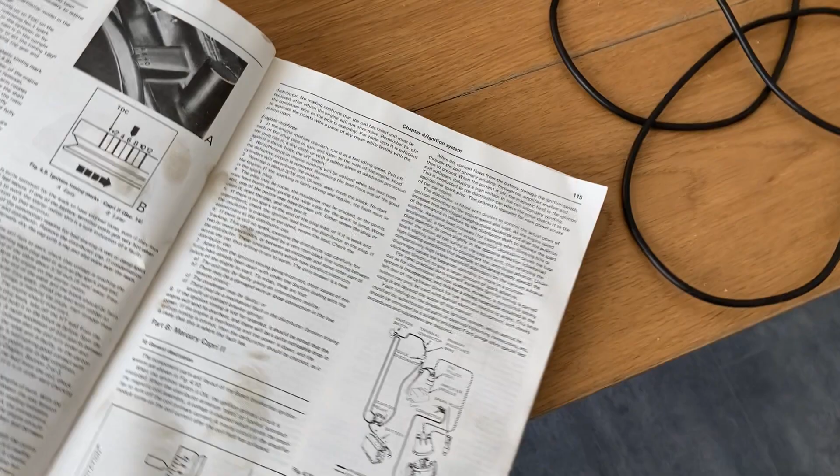Alrighty then, so today we are looking at the timing for the Ford Capri. I've got the Haynes here, and these are the timing marks as you can see on the car.

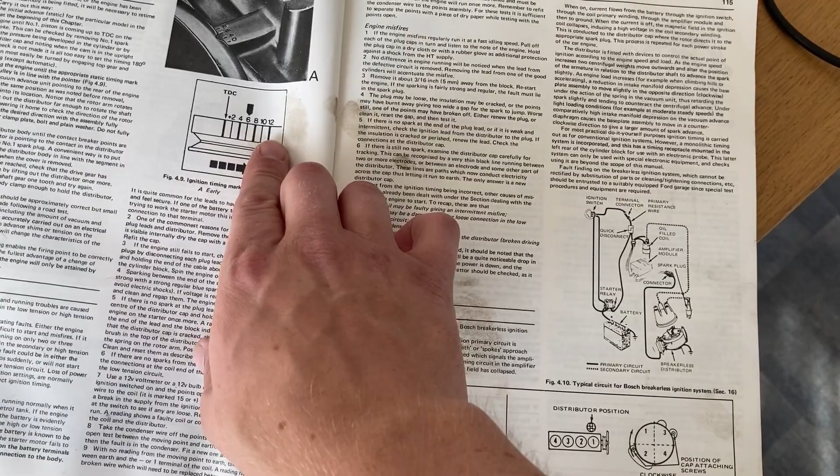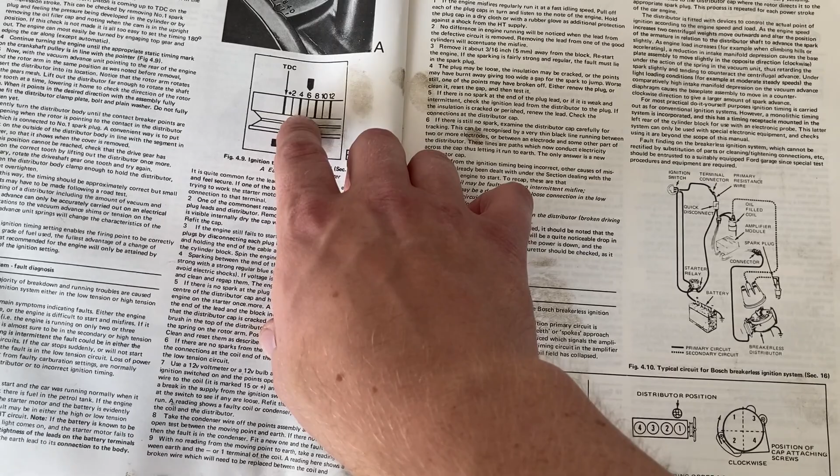Now in the Haynes manual it says that you should, for a 2 litre, mark it 4 before TDC, but online I'm seeing a lot of people doing 6 and 8 due to modern petrol.

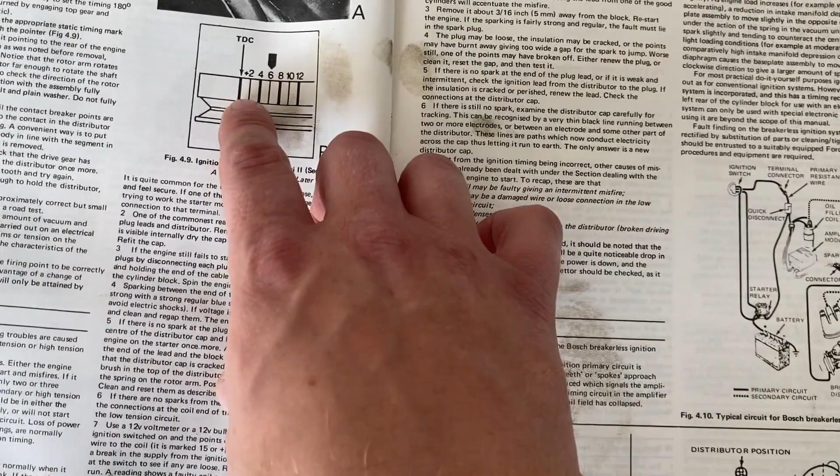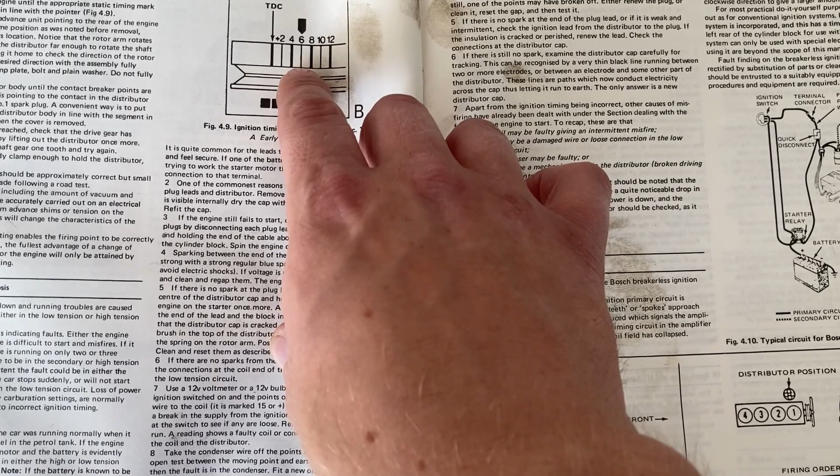So the larger marks on the front pulley go TDC, 4, 8 and 12. So I've marked 8, that way I can just back it off a little bit to 6.

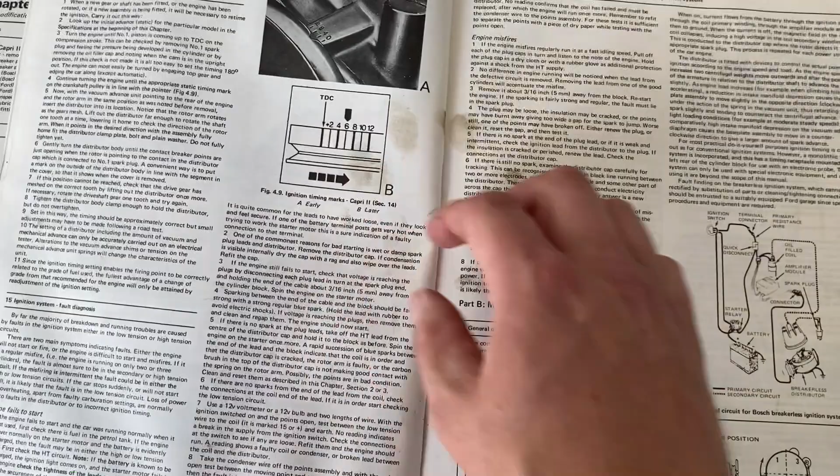It was a very faint line, and I couldn't get any paint or Tipp-Ex in there, so I don't know why I haven't done this a lot earlier, because the car still runs rough. I'm pretty sure this is my problem.

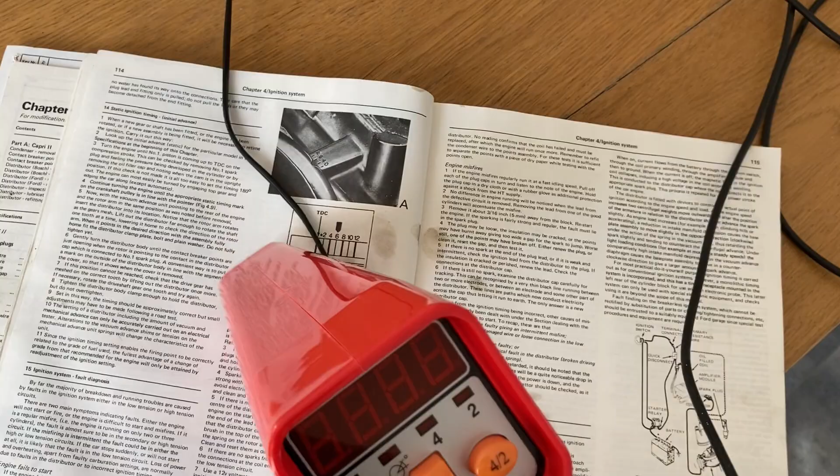And it's all because I haven't had one of these. So I purchased this, it was about 40 quid, and it has the digital readout, so you can actually advance and retard on here. But I thought I'd do this just so I'm doubly sure.

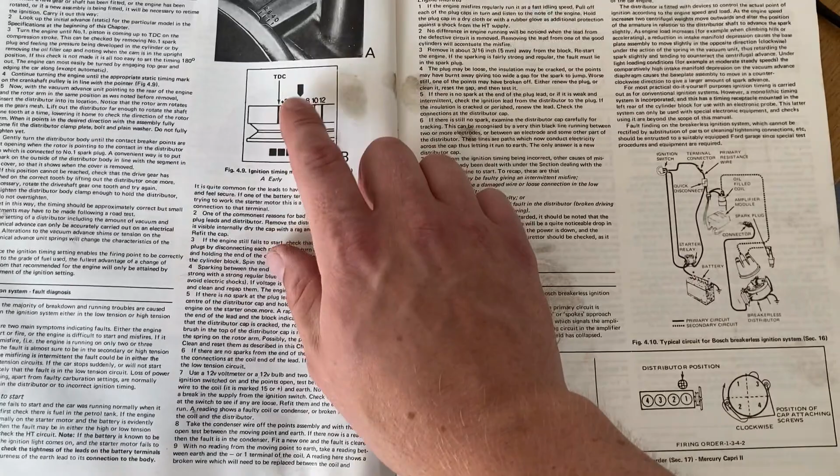The reason why I bought it with the digital readout is because my Ford Escort is on points and it doesn't have a tachometer, so I can see the revs on this one. It's not a problem with the Capri, but yeah, I've already marked up 8 before TDC and TDC.

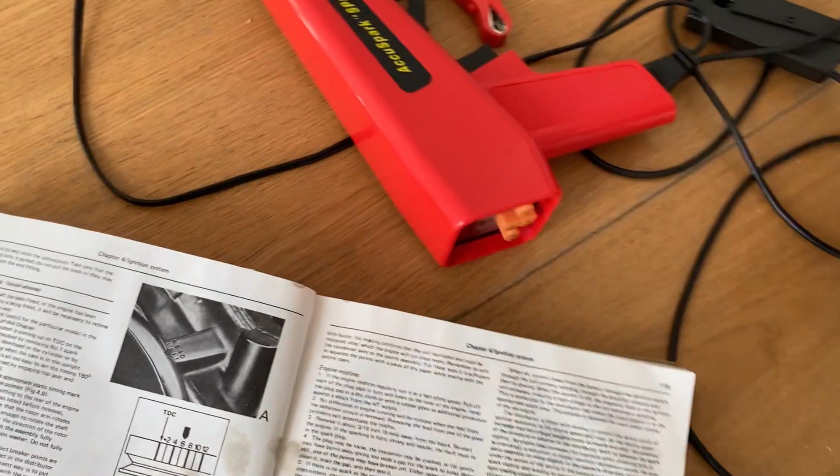So I'm going to try this out on the Escort first, make sure that it's all good and see how it works. One thing I just learned was there's a little marking on the back here, and that has to be pointing towards the spark plug.

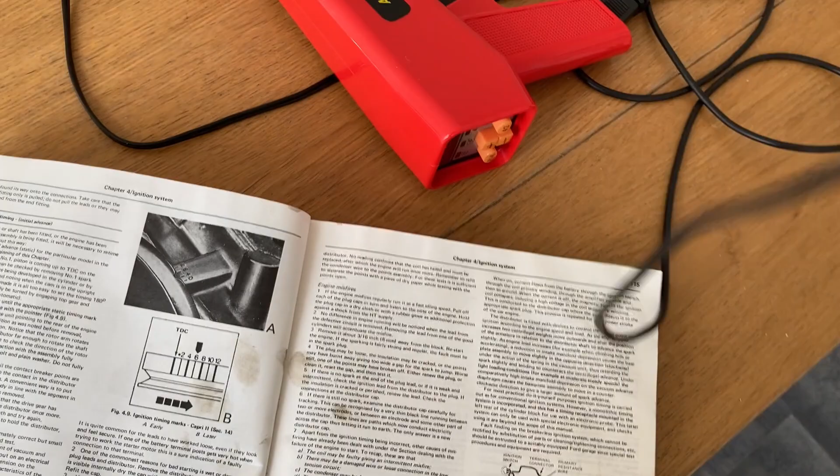I tried this the other day and I might have had it the wrong way around, so that's good to know. So let's try it on the Escort, move out of the way, go take the Capri for a drive, get it warmed up, and then check the timing.

Okay, so the reason why I am testing on the Escort first is due to it being on points, and it's coming up for a service now, so it's going to really need that changing, or those changing even. And I've never really checked it.

I always let garages do that, so I thought let's check this first, see where it's at, make a note of it. I also have a new dizzy cap and rotor arm, so I'm going to be wanting to put them on, and if anything changes, I've got a baseline then of what to go for.

So just warming this up now, and then we'll get this checked.

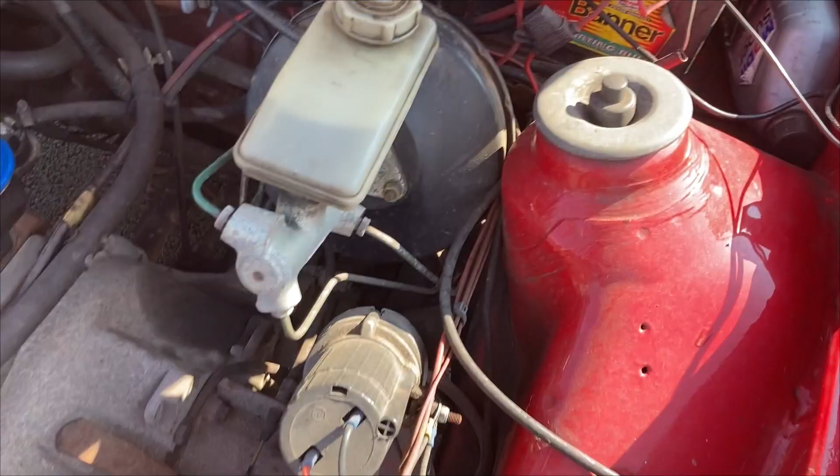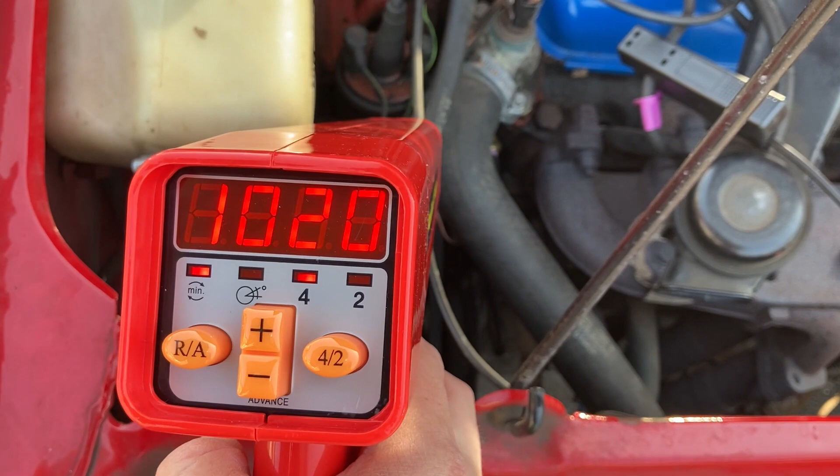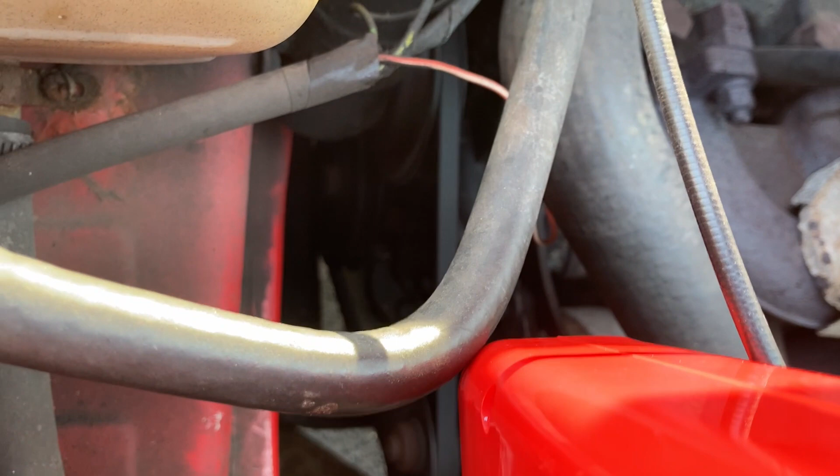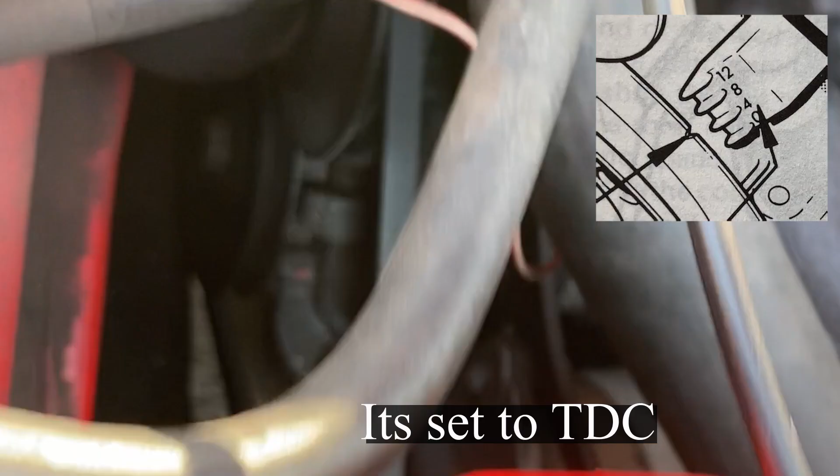Okay, so we can see that the car is running at, I guess, nearly 1000 RPM, and if I press the button, we should be able to see the timing mark there. Whatever that mark is, I'll have to check the Haynes, but that is where we're at. I actually just set this RA button to 0, as it seems to be up at 10 before TDC, I guess.

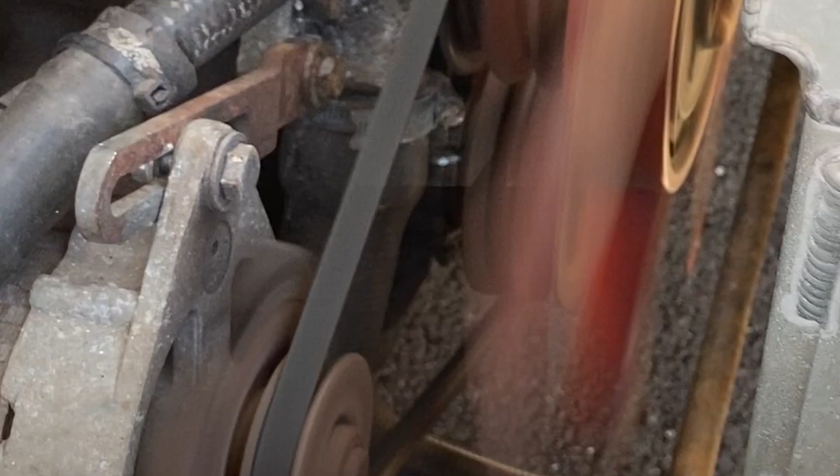So I managed to drive the car around the block, but pressing the brakes or even using the indicator made the car jump violently. So I pulled back up and just started checking the timing while it was still on choke.

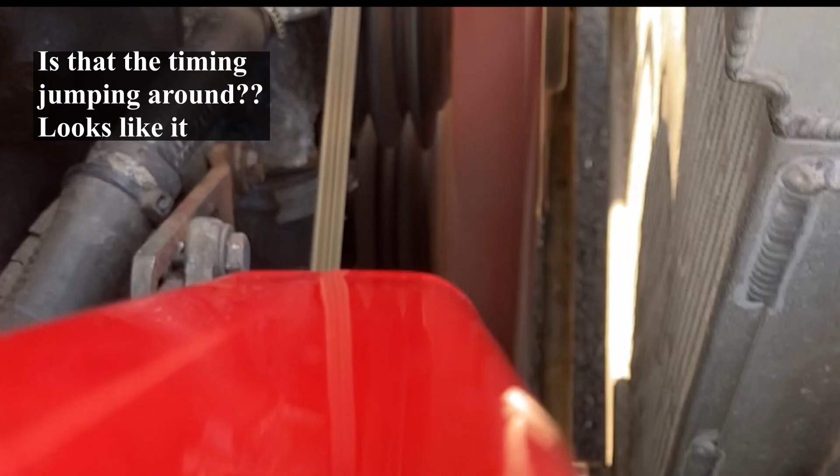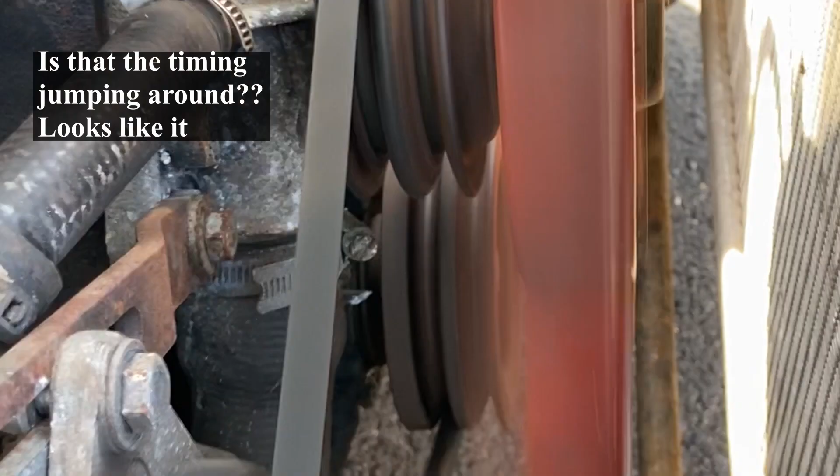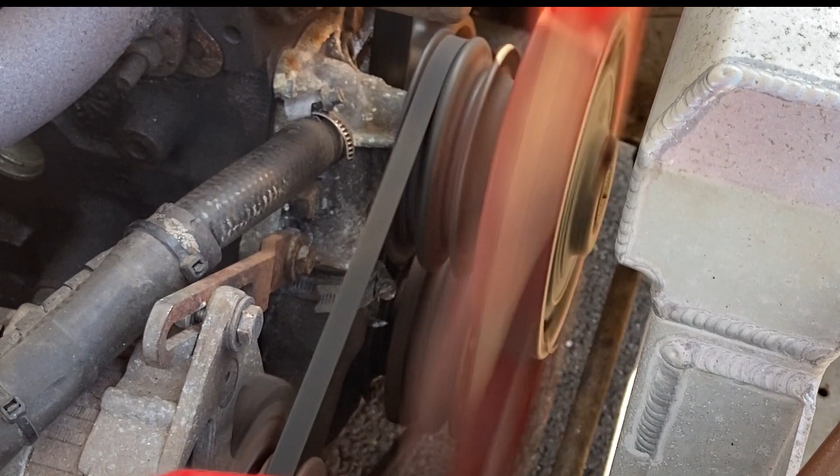So it's going between TDC and 8 by the looks of it, moving around, maybe a bit more. Can't quite tell there, back to TDC, back, yeah, it's not good.